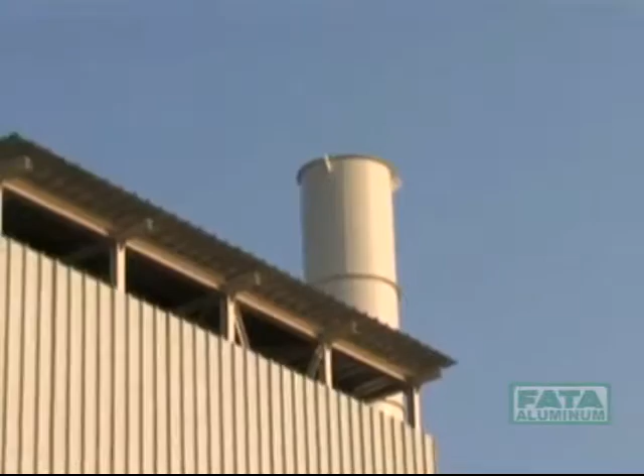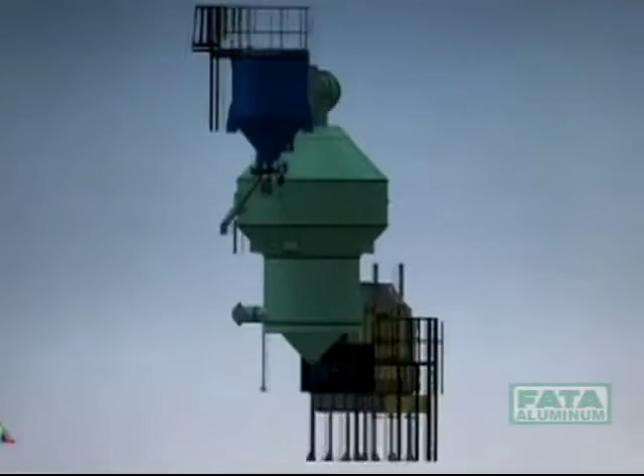With the EcoRec furnace, FATA Aluminum provides an effective solution to a major cost problem faced by foundries: that of used sand disposal.

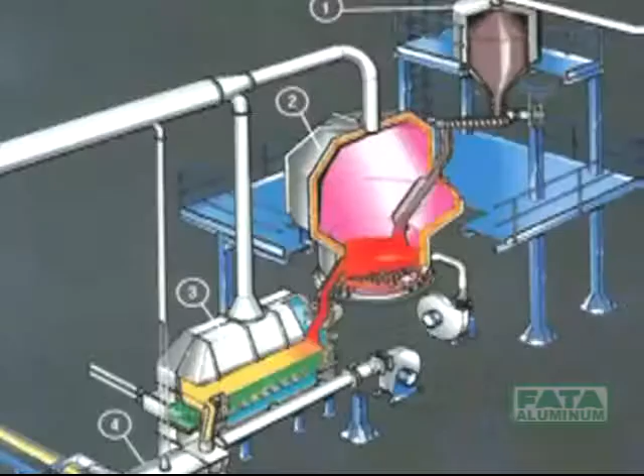Used sand is heat-treated as follows: sand to be regenerated is stored in a silo high up on the structure, and a screw metering system feeds sand into a calcination chamber.

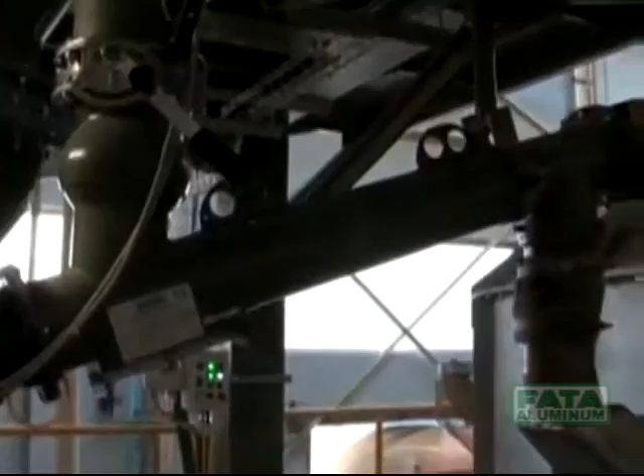Combustion takes place in the cylindrical calcination chamber with insulated walls, triggered by air and gas fluidizing nozzles.

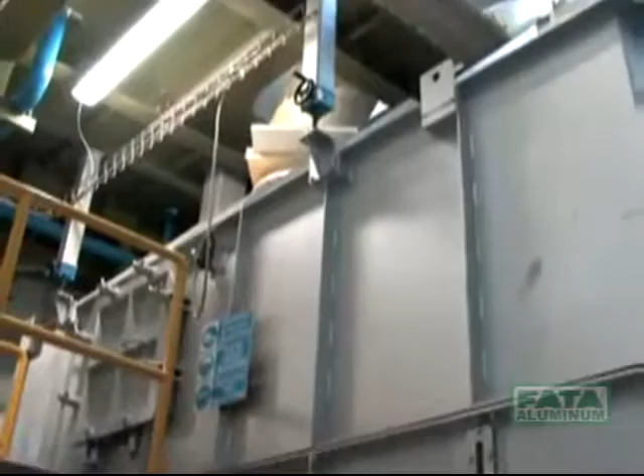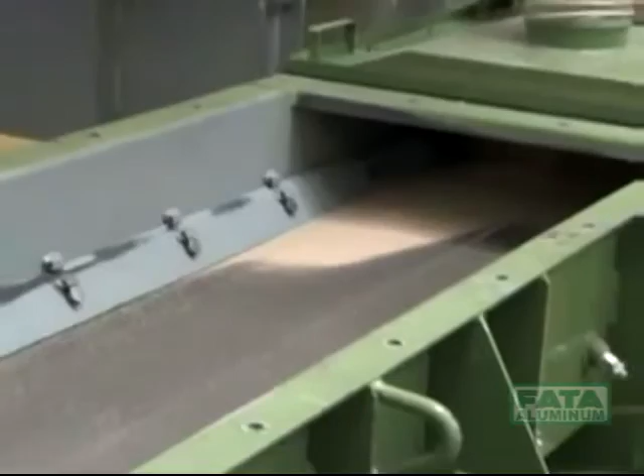The sand is subsequently passed through a cooler consisting of a fluid bed chamber and two bundle units through which cooling water is circulated. From the cooler, the sand is poured onto a vibratory screen in order to remove any impurities.

After this brief description of the sand regeneration system components, we'll go on to give you some more details.

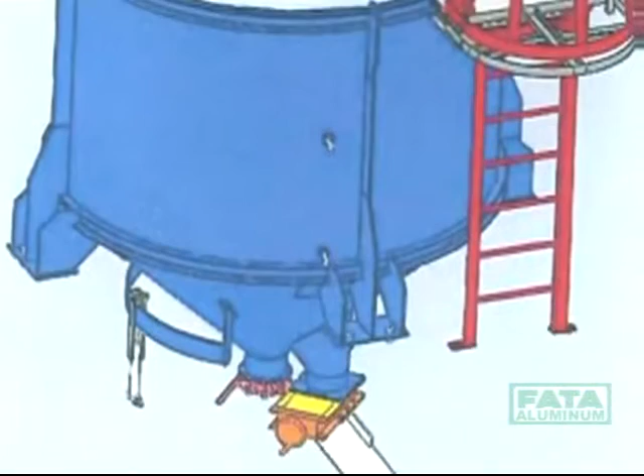The 10-ton silo placed high up on the structure and containing the sand to be regenerated consists of an iron cylinder and a reverse cone with a sliding gate-type outlet shutter. The silo is equipped with minimum and maximum ultrasound level sensors.

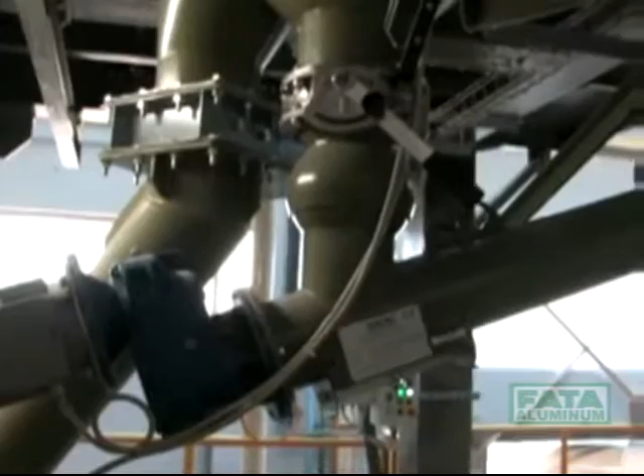The 5-ton-per-hour screw feeder conveys used sand from the silo to the EcoRec furnace.

The 5-ton-per-hour EcoRec furnace includes a chimney, a hood, a calcination chamber, and a set of thermocouples for controlling the temperature of fumes, air, and sand.

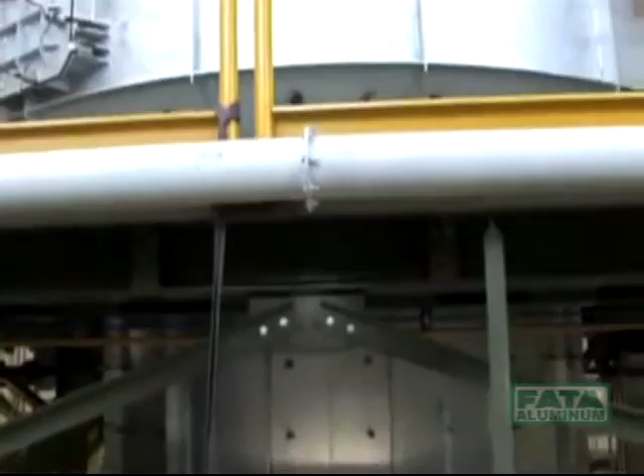Combustion inside the furnace is assured by a pair of pilot burners with an ionizing flame detector, which are left on continuously for safety reasons.

In the fluid bed calcination chamber, the sand to be regenerated is heated to 600 to 800 degrees centigrade.

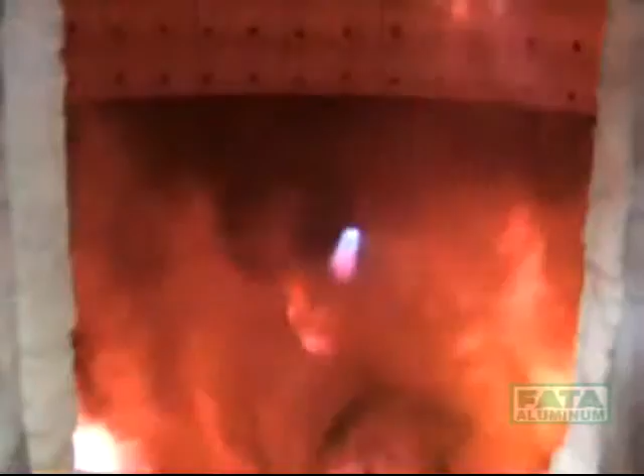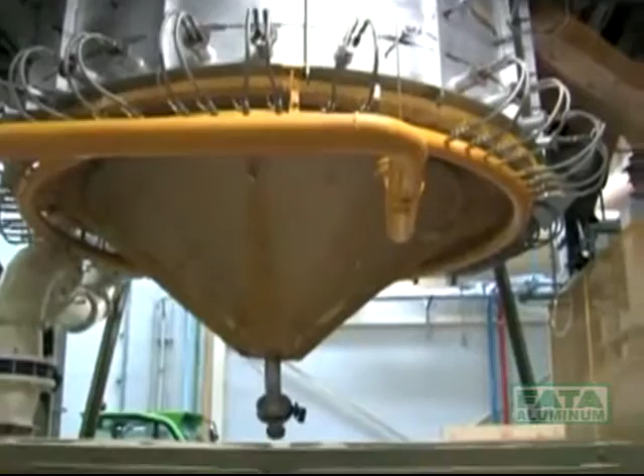The metal base plate incorporates the sand fluidizing nozzles and the gas distribution nozzles, assuring the mixing of air and gas directly inside the calcination chamber.

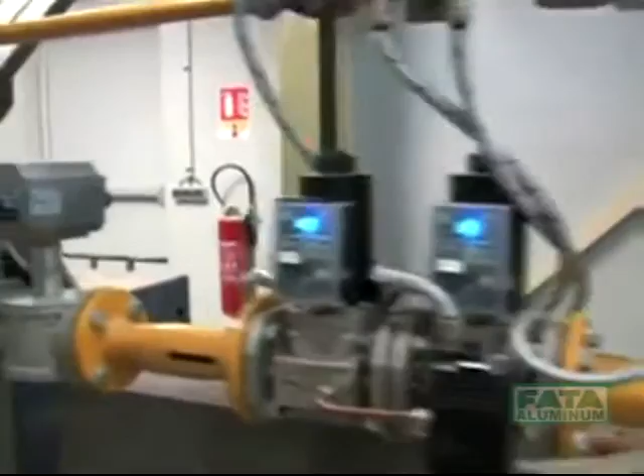The gas supplied to the nozzles is fed through a set of filters, pressure reducers, and solenoid valves, and thence through a modulating valve which regulates the flow to secure the specified temperature in the furnace.

A control panel complete with a pair of microammeters is provided to control the flame of the two burners.

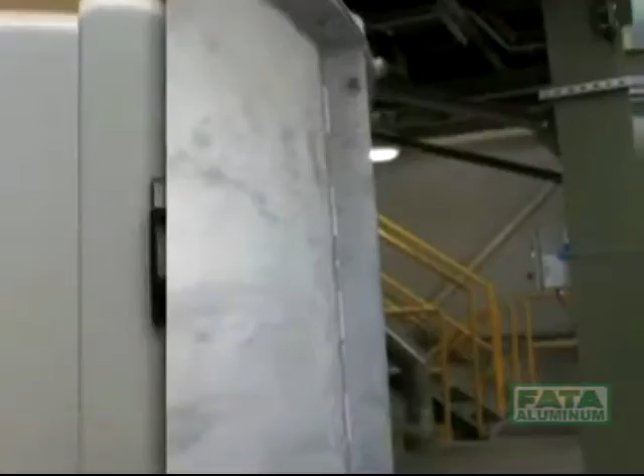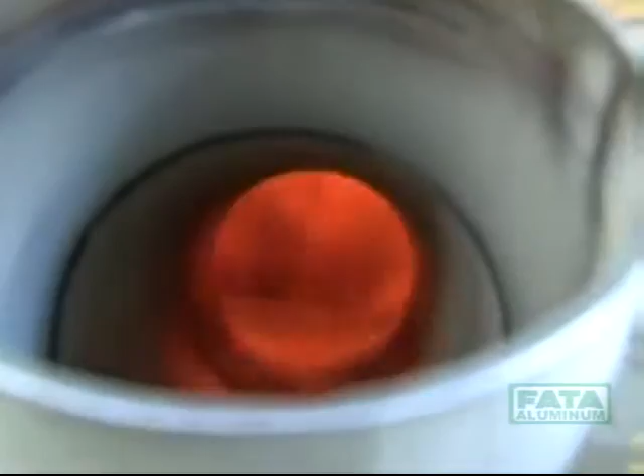An inspection hatch permits the inspection of the furnace interior to monitor combustion and sand fluidization.

The size of the hood is such as to hold the fumes for at least 2 seconds, so as to ensure full combustion.

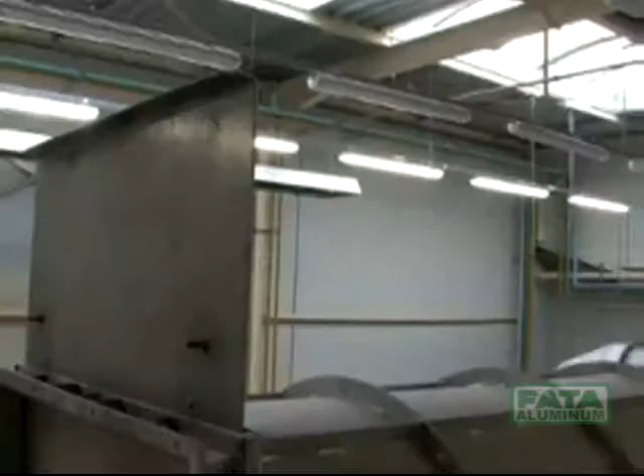The chimney conveys the combustion fumes to the heat exchanger for the purpose of heat recovery.

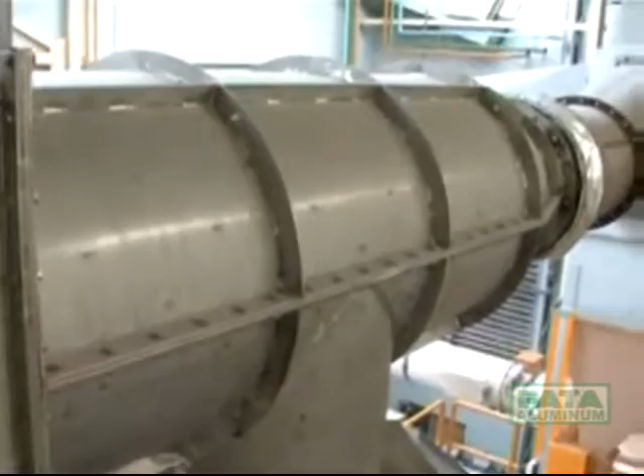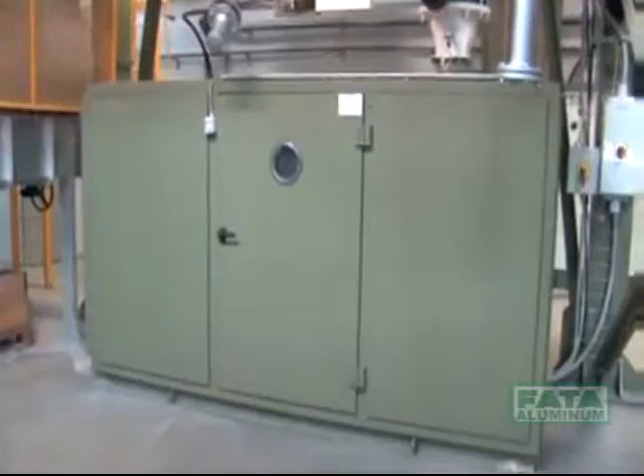The sound-insulated ventilation booth, located below the furnace, consists of a self-supporting structure made up of a steel section frame and removable soundproofing modular panels. The booth contains a centrifugal fan for the furnace and a centrifugal fan for the cooler.

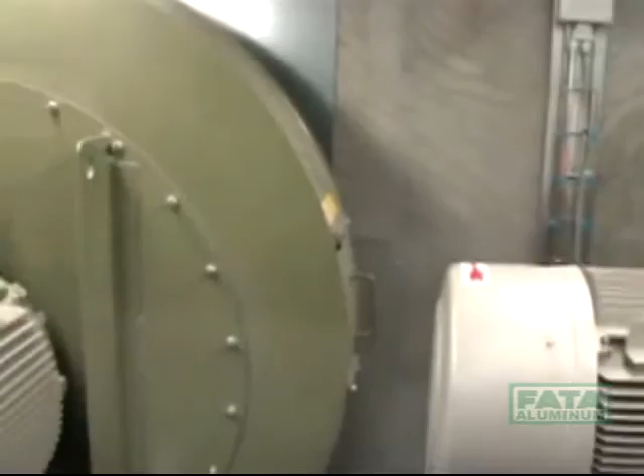The cooler is designed to remove heat and dust from the sand exiting the furnace by the combined action of the water in the tube bundle unit and the cooling air for the fluidized bed of sand, aided by a suction system which removes the dust particles.

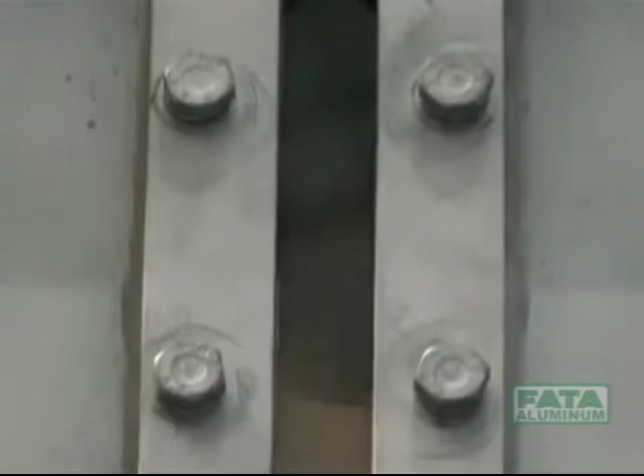Fluidization may be monitored from the outside through strategically positioned sight glasses.

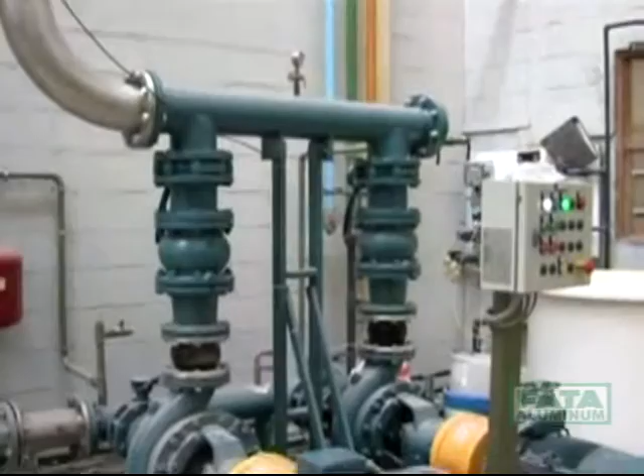Twin centrifugal pumps, one as standby, are used to supply the cooler tube bundle unit with water and glycol, to assist cooling the sand down to 40 degrees centigrade maximum.

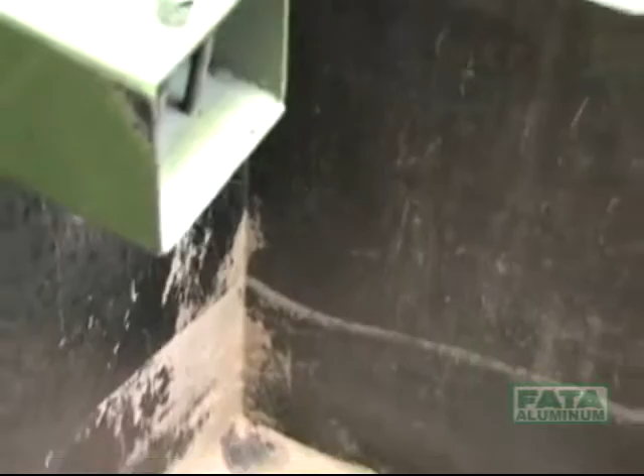The final screen is a robust 5-ton-per-hour vibrating structure designed for continuous industrial use. Sand from the cooler is poured onto the vibratory screen to eliminate any residual foreign particles.

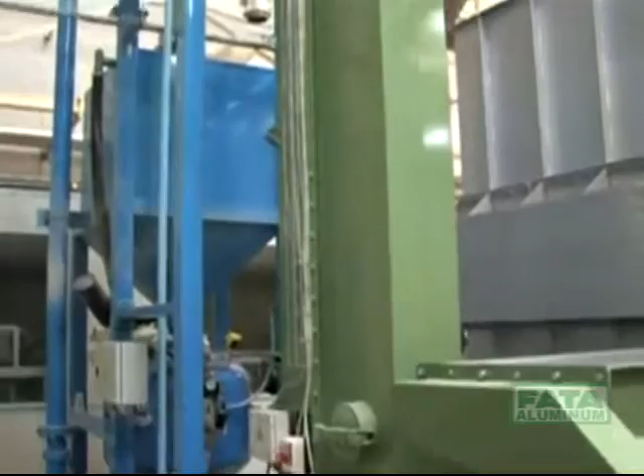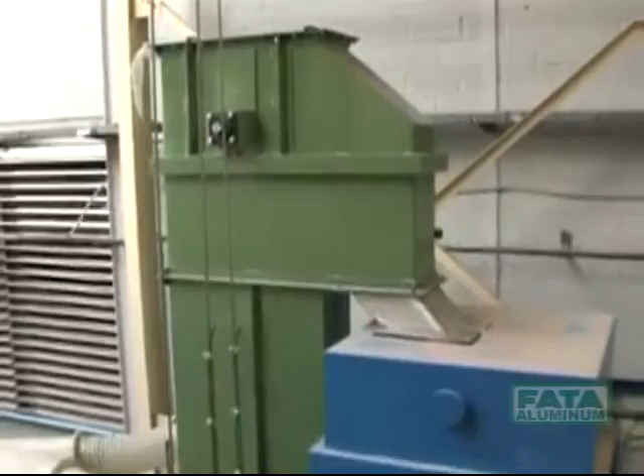A steel bucket elevator with anti-wear protection consists of a robust sheet metal drive and idle end heads and drive and idle steel drums. From the vibratory screen, sand is poured onto the elevator buckets, which in turn feed a pneumatic conveyor.

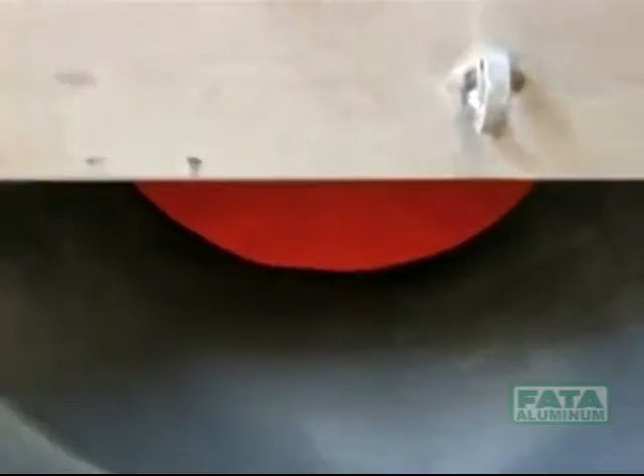The fumes exiting the chimney pass through a pre-separator to extract the dust and thence onto the heat exchanger.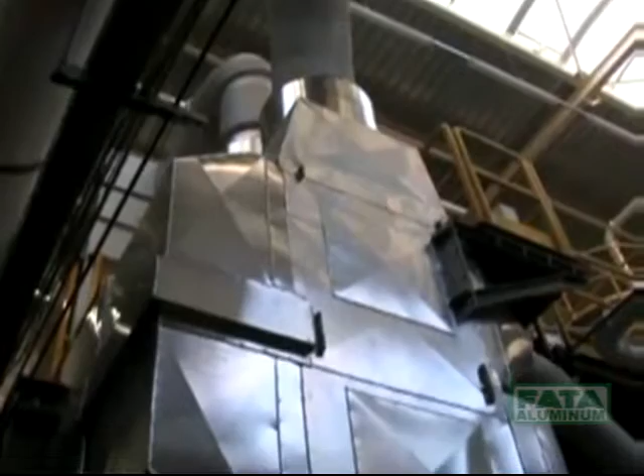The stainless steel plate-type heat exchanger permits full recovery of heat from the fumes exiting the furnace at approximately 500 degrees centigrade.

The heat recovered provides for the preheating of combustion or fluidizing air on furnace inlet.

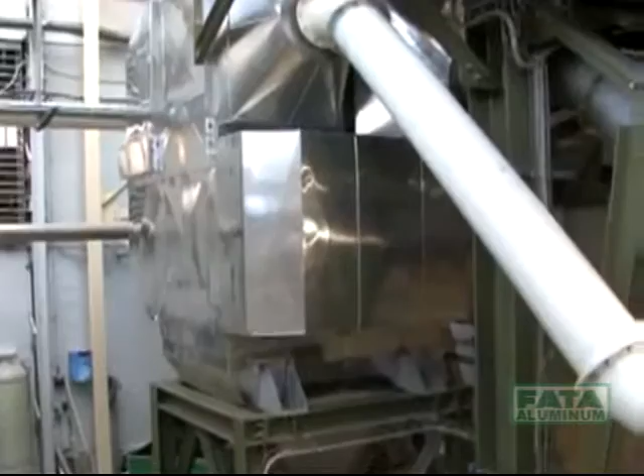The furnace electrical control system governing the sand regeneration system includes 6 power modules and 2 Logix modules.

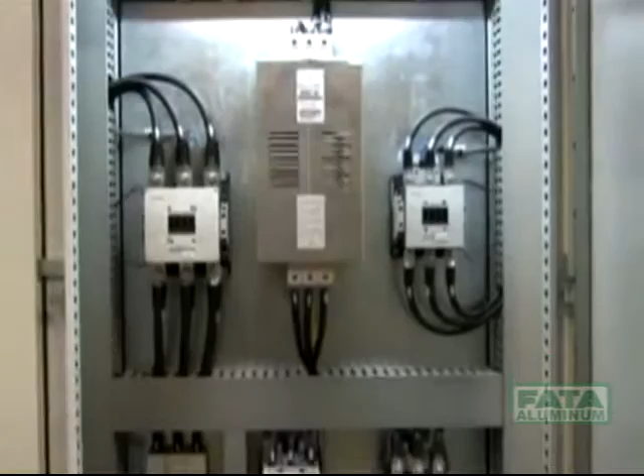The fumes extraction electrical control system consists of 3 modules: a power module controlling the soft starters for the furnace fans and cooler.

A power module with soft starters for the evaporative tower, and a Logix module with input-output cards.

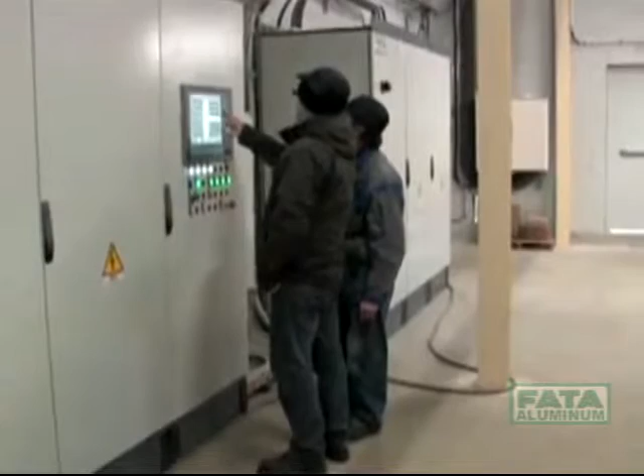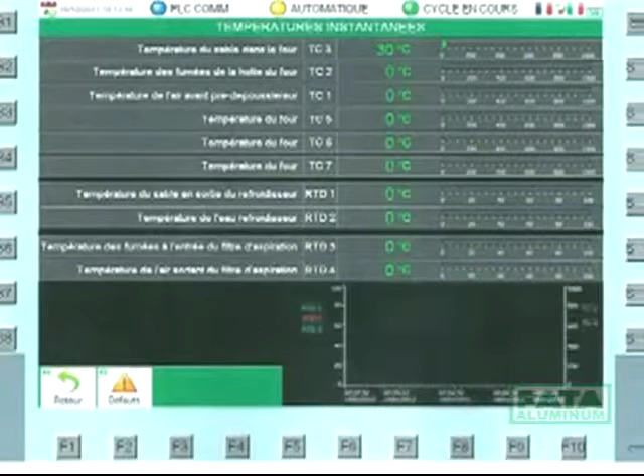An effective monitoring system with page display for dynamic status of major system components, operating parameter settings, instant temperature display, alarms, and operator support during regeneration system startup, running, and troubleshooting.

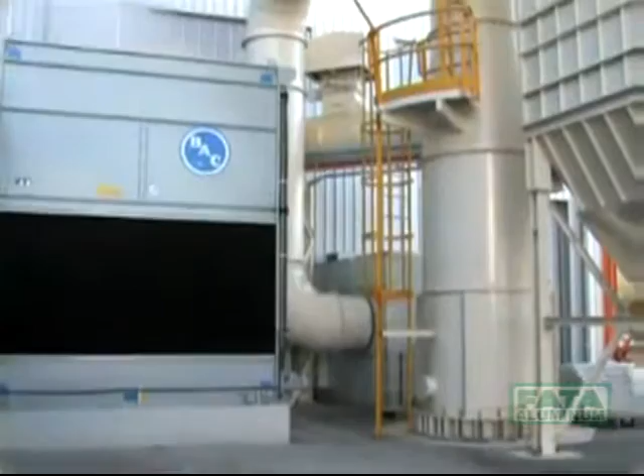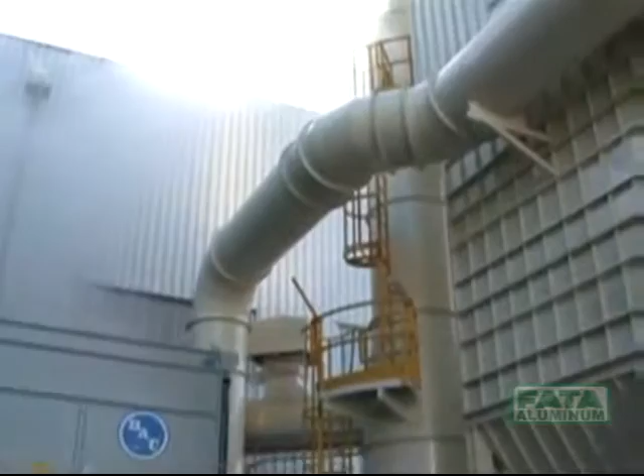The water cooling tower installed outdoors consists of a load-bearing structure of zinc-coated steel panels, a galvanized sheet recirculation water tank, and an in-tank resistor kit for water temperature regulation at a constant plus 4 degrees centigrade.

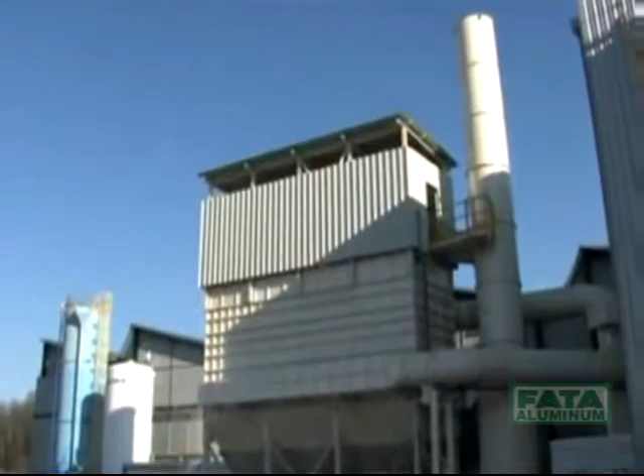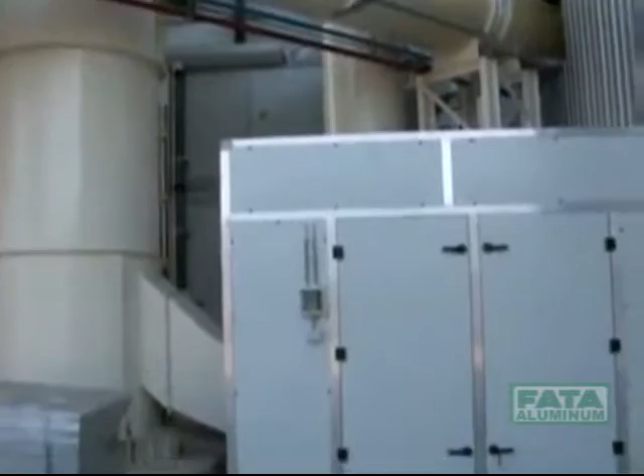The filtering system for dust and fumes includes a robust metal frame supporting structure, a plenum of welded top-mounted sheet metal for filter bag removal from the top, a dusty air sheet steel center chamber, a set of filter bags complete with supporting wire frames, a dust removal screw, and a soundproof booth with a centrifugal fan on the inside.

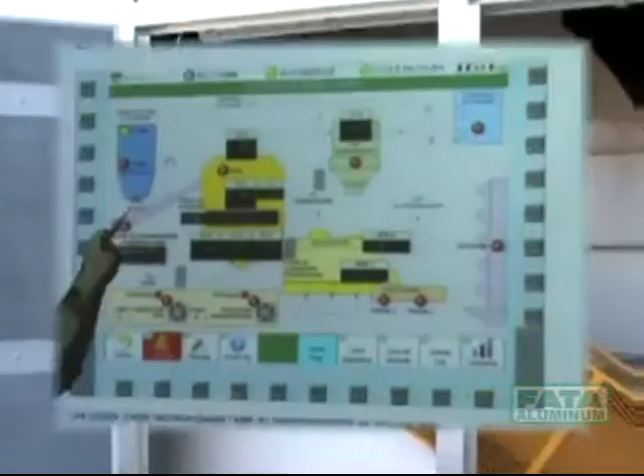After commissioning the setup, a training course for customer personnel will ensure efficient system running and maintenance.

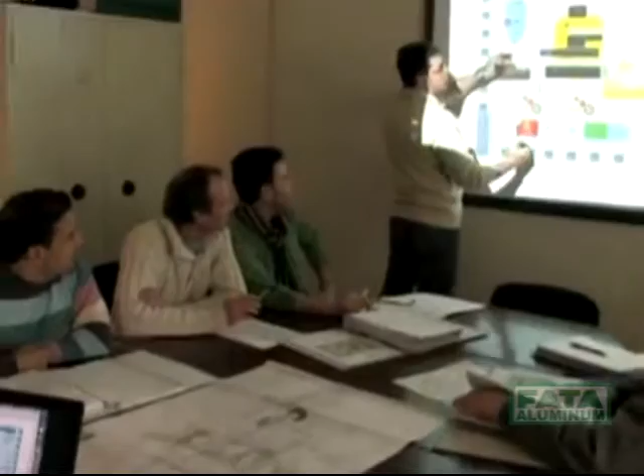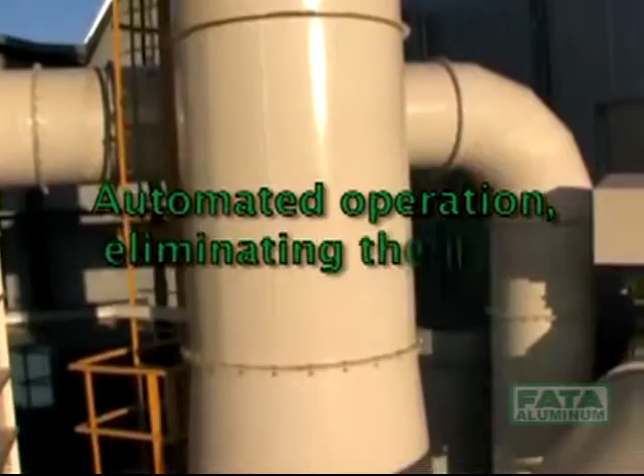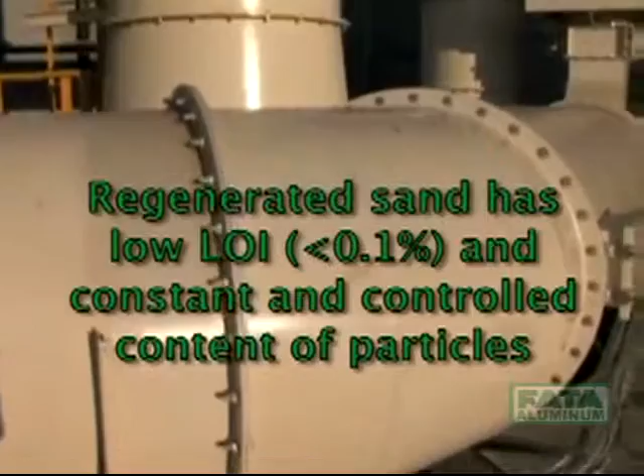The main advantages of the EcoRec sand regeneration furnace are cost-effective operation, drastic reduction in costs for new sand and disposal of used sand, automated operation eliminating the need for continuous manning, and quality of regenerated sand equal to or even higher than original product, as regenerated sand has low LOI, less than 0.1%, and constant and controlled content of particles. Sand can be reused in the original process without new sand addition.

Gas emissions and solid residues meet environmental regulation requirements.

FATA Aluminum, for years now a world leader in the aluminum foundry industry, is a global company with plants in the United States, Mexico, and Italy.

The company's mission is the continuous improvement of the quality and efficiency of the technology processes and value added for its customers through a systematic and established policy of partnership with all the major customers worldwide.